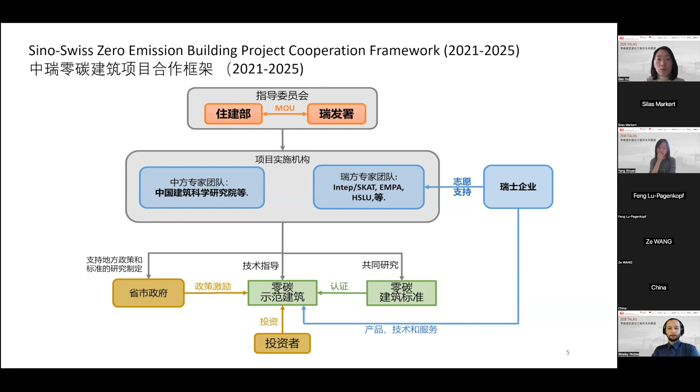So based on our teamwork and collaboration, we have done 3 parts in the past few years. First of all, we have introduced some leading energy and environmental standards and technologies for buildings to support research in China. For example, I have listed here some leading technologies, mandatory standards, voluntary standards, energy efficiency labels, as well as standards and expertise.

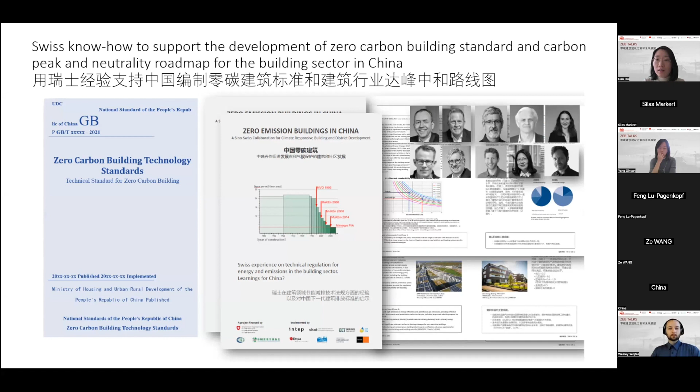So through our collaboration, these have been incorporated into China's research. For example, China is drafting zero carbon building technology standards, and also the roadmap for carbon peaking of buildings in China. Based on the research, we have also organized many capacity building programs.

For example, this is the 10th ZEB Talk we have had. Through this online platform, we try to disseminate knowledge and expertise from these projects. In the future, I think we will try to organize more diversified offline activities, for example, working with local industry associations and a training center under MOHURD, universities and research institutes, providing capacity building to local government officials, scholars, and students.

Based on the research and capacity building, we have also selected some demonstration projects. In April last year, we selected the first batch of demo sites in Shenzhen, the sport center in Shenzhen, and a school building in Shaoxing.

And in Fangshan, Beijing, there is a community center. Our teams have been working with the local designers, providing technical recommendations and consultancy to help them meet the zero carbon target, after more than a year of cooperation.

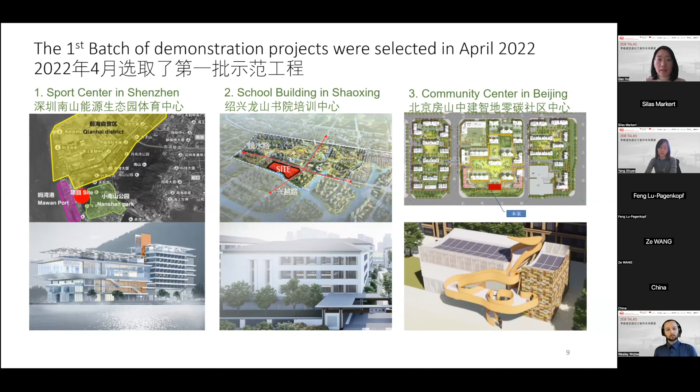This project has already basically finished design or is even under construction. In February this year, we selected the second batch of demo projects, including Dalian Hutan residential community, which is a very big community. Another one is in Hanzhong Liuba County — it's a bee museum.

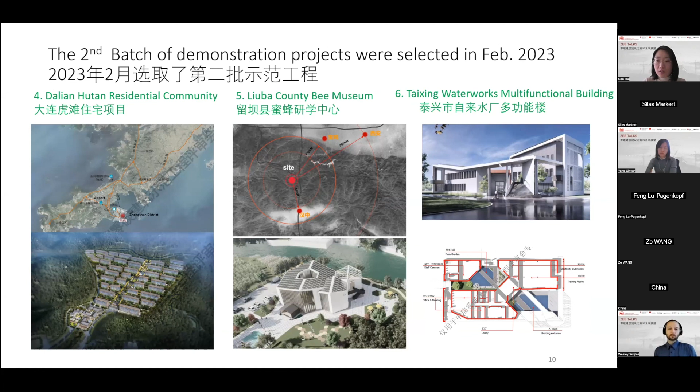We also selected Taixing Waterworks multifunctional building, Jiading Future City Exhibition and Market Halls in Shanghai, and also the Wuxi Fund Park phase 2, which is an office building. So we have selected the second batch of 5 projects.

You can see that the coverage of our demo projects has been very wide, covering the major climate zones in China with various functions. We may have a third batch in the future, but when choosing it, we will focus on the cold zone in China and retrofitting of existing buildings.

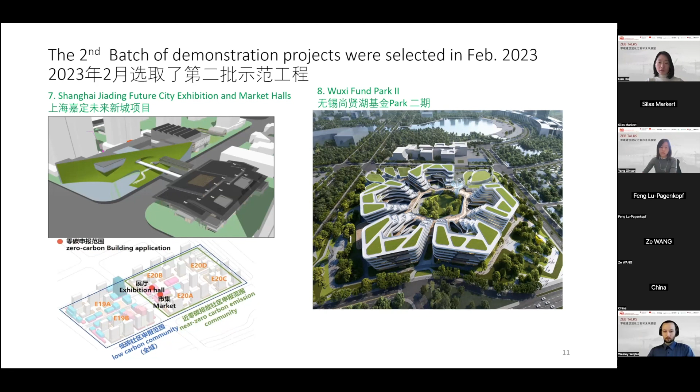We will continue to follow up and provide guidance to the design and construction of these projects. We will also work with local governments on capacity building and standards setting, as well as the industrial sector. So that is the profile of where we are, and later we will have experts from our team talk about the achievements. Thank you.

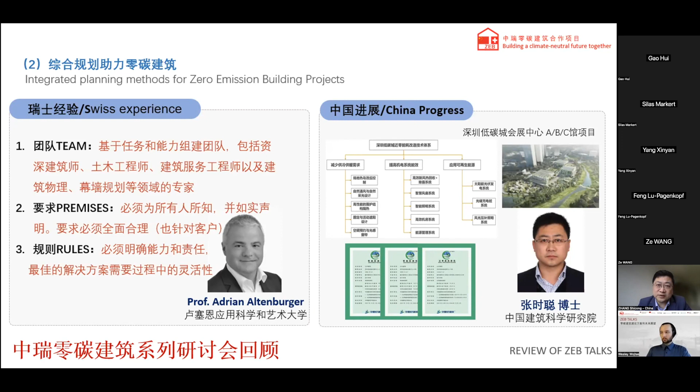Thirdly, in China, we introduced our latest progress in these areas, the Chinese practice in lower carbon emissions as well as net zero carbon emission. We used the lower carbon center in Shenzhen as one example, as well as the exhibition hall in Shenzhen as another example, to illustrate how we set up these lower carbon demonstration areas, and how we can make energy a part of the inventories while complementing each other at the same time. This is the topic for the second session.

For the third session, we shifted the focus back, because for the long term and short term, for larger and smaller areas, we should finally translate our experiences into the community. In China, 80% of buildings are located within communities, because inside the community, the carbon emissions reach around 70%.

How can we facilitate the communities? Let the community have very good public transportation, enriching public life, and at the same time help us achieve lower carbon emissions at the community level using renewable energy at the best.

Under the lectures from Professor Daniel, he introduced us to Switzerland's experience in promoting 2,000-watt communities and the pilot project Switzerland has done before. In China, we also invited the chief researcher from the Scientific Promotion Centers of the MOHURD, Madam Liu Younong. She introduced us to Chinese progress in green communities, the policy support, as well as the zero carbon demonstration areas of the Shenzhen Damenshan area. This is the content for the third lecture.

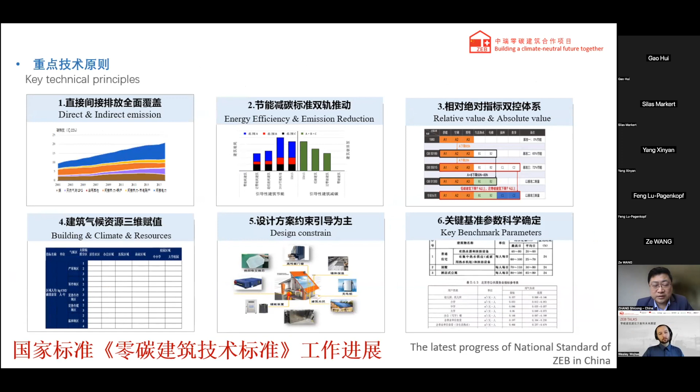There are 6 key technical principles. After our discussion, we have basically reached consensus.

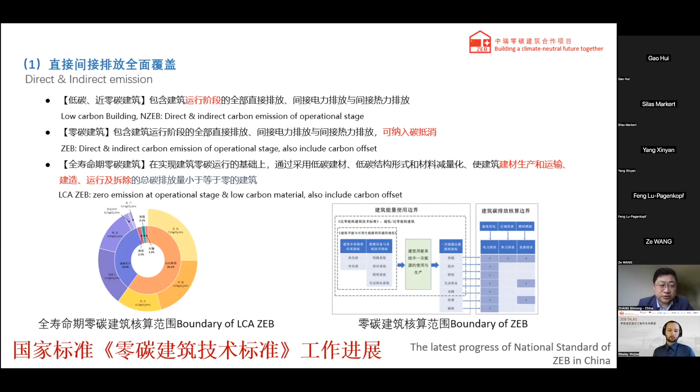The first one is about carbon emission in the building sector. Although IPCC has divided it into scope 1, scope 2, scope 3, direct and indirect, I think for buildings as the end user of energy, we need to lower both direct and indirect emission, as well as implied emission. So we have calculated all the direct and indirect emissions. Low carbon NZEB includes direct and indirect carbon emission of the operational stage, and for ZEB, it includes all direct and indirect ones.

The second principle is the energy efficiency and carbon reduction standard. Because energy efficiency is a compulsory, mandatory standard in China, it has brought significant impact. But now with the carbon emission standard, on one hand we want to raise the energy saving standard, and we also want to draft the zero emission standard, so we can have both energy efficiency and carbon reduction at the same time.

The third one is that we have set relative value and absolute value to control emission. If we only use the relative value, it's easy - for example, we can state a percentage reduction compared with a benchmark. But the relative value will leave us lacking an absolute number. But if we set the absolute number, we have so many different kinds of buildings in different climate zones.

One indicator cannot be practical for all buildings all over China. So even for large public spaces above 20,000 square meters, it will be different for buildings of 20,000, 50,000, or 100,000 square meters. So we have taken both relative and absolute values - as long as they meet either relative or absolute, we can consider them qualified.

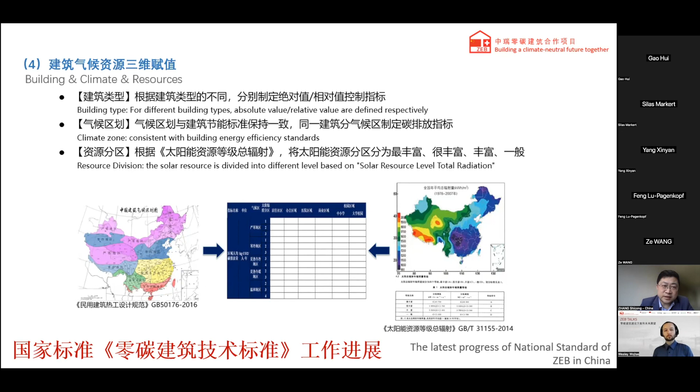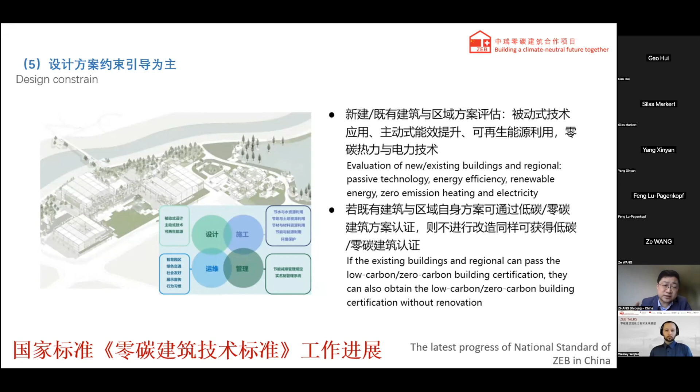The fifth principle is that we have constraints on the design. Because for buildings, carbon emission is produced during operation, but during the design stage, if we cannot make the design low carbon or zero carbon, it's almost impossible to achieve zero carbon in operation. So from the beginning, at the design stage, we want to ensure they are zero carbon buildings. Based on that, we have divided into low carbon building, nearly zero carbon building, zero carbon building, and whole life cycle zero carbon buildings.

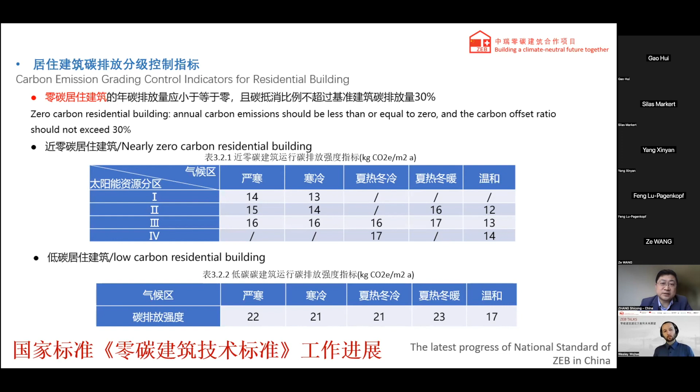For these four categories, for example residential buildings, by 5 climate zones in China and different solar resources, we have given the reference number of kilogram carbon dioxide per square meter annually. We have also given the indicators for NZEB and ZEB.

And also for public buildings, we divide them into small public, large public, small hotel, large hotel, shopping mall, teaching building, medical building, etc. And also by different solar resource, we provide them the carbon emission densities.

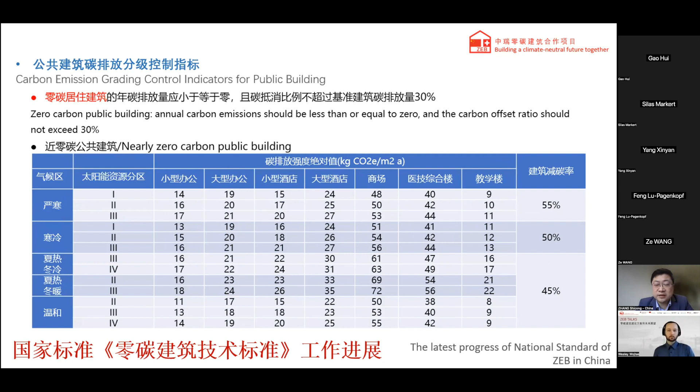On the right side, you can see the relative carbon emission rate. We can see that for low carbon public buildings, it's about 35% or 40%. For nearly zero carbon public buildings, the emission reduction rate is about 45%, 50%, or 55%. So these are the numbers we have given.

By the end of March, it will be made public. Currently, we are already making the plan for the work of 2025 to 2030. So like I said, this is our last ZEB Talk. In the future, we are going to focus on our demo side between China and Switzerland.

In the past 2 years, like GAO Hui mentioned, we have selected 2 batches of demonstration projects, 8 projects in total. The first one was in Shenzhen, Nanshan Energy Park, the sports center.

This building was done by Jianxue, the design company. They also gave it a name called the zero carbon, 'heaven and earth.' Its design principle is to be environment friendly.

On February 15th, the Chancellor of Switzerland and the embassy representative, Miss GAO Hui from the embassy of Switzerland, Miss Wang Ze, and also the contractors of this company as well as the project owner, have visited the site.

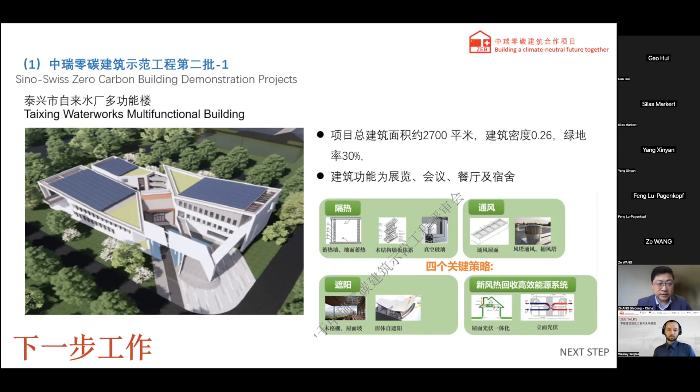The second demonstration project is in Wuxi Fund Park 2. This is a culture and conference center with 9,500 square meters. It will be built into the first international Zero Carbon Conference Center, built by the Wuxi Taihu Development Group Company.

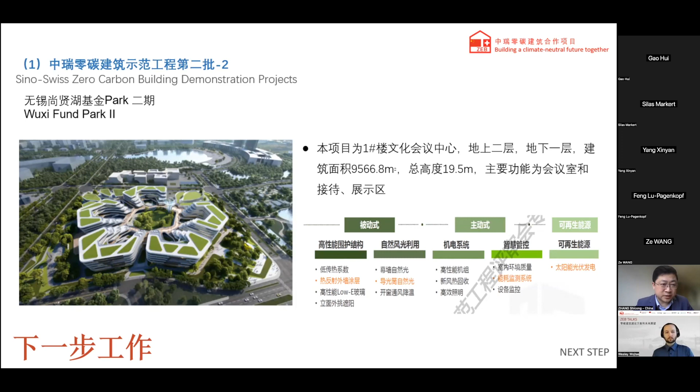It is supported and authorized by the Wuxi government to operate. A state-owned asset management company manages the operation of this project. This project also uses ZEB as its target.

The third one is done by the Shanghai Huajian company. It is the Shanghai Jiading Future City Exhibition and Market Halls. It also aims to be a low-carbon project, meaning to reduce 30% of its emissions.

They also want to build the local area into near zero carbon sectors. Now they are operating on this 3,000 square meter project.

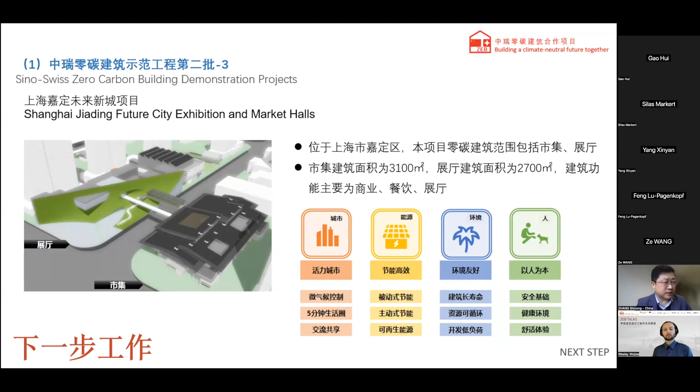And we are going to use this project as a demonstration area for the low carbon and zero carbon project.

The fourth project is the Bee Museum in Liuba County, which was introduced by Madam GAO Hui before. It is a project sponsored by the People's Bank of China, a national sponsored project as part of the national poverty alleviation campaign to move local people out of poverty. This is a comprehensive zero carbon building demonstrating research in bee culture, the bee project, and honey production. On the roof, it demonstrates the shape of a beehive.

We are also going to make Liuba County one of the pilot regions for zero carbon areas. The final project approved for the second demonstration project is the Dalian Hutan residential community. There are 39 buildings in this complex: 34 buildings for common residents and households, and 5 buildings serving as dormitories for college students. We are going to apply the zero carbon requirement to the project, related to the construction requirements of these building blocks and areas.

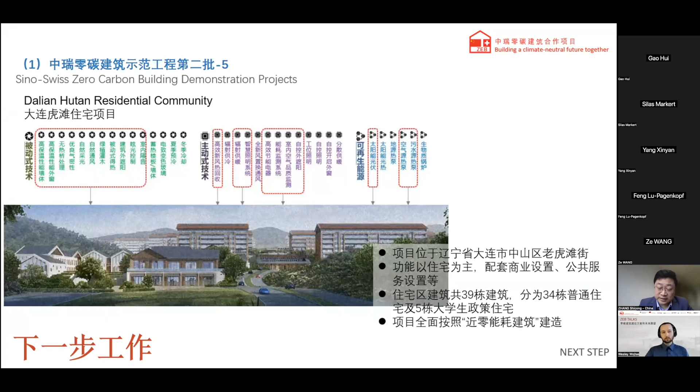These are the 8 projects that have been approved by the Ministry of Housing and Urban-Rural Development, MOHURD, and I think in the coming 2 to 3 years we are going to see the actual implementation and the real results of these projects. We are also going to talk with the local governments.

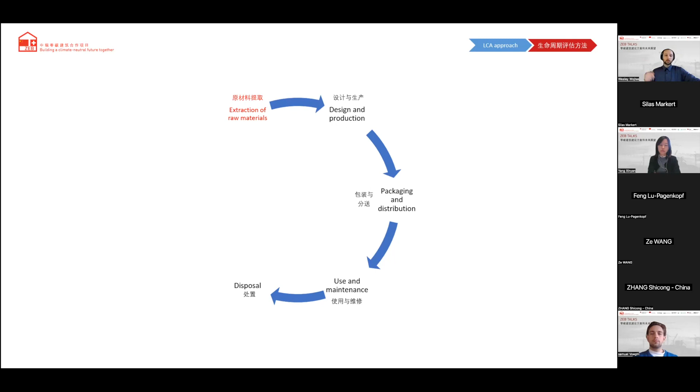However, there are carbon emissions coming up in all these steps, for instance, through the transportation of raw materials, of building components, and so on and so forth. This is quite carbon intensive. Then the choice of material supply at the very beginning can have a big impact on our carbon accounting.

Then we have several topics within the supply chain that create the possibility to reduce carbon emissions. As you can see, I go a bit quicker now. There are a lot of topics when looking at the operational use of buildings and the maintenance of such.

Now, usually the materials and building components come to an end of life and will be either burned in an incineration plant or put on landfilling. However, we can also work around this end of life cycle by looking at the whole life cycle of the materials and how we can recover certain elements of building components, how we can reuse or repurpose them, or even bring it directly back to use in a different building, for instance.